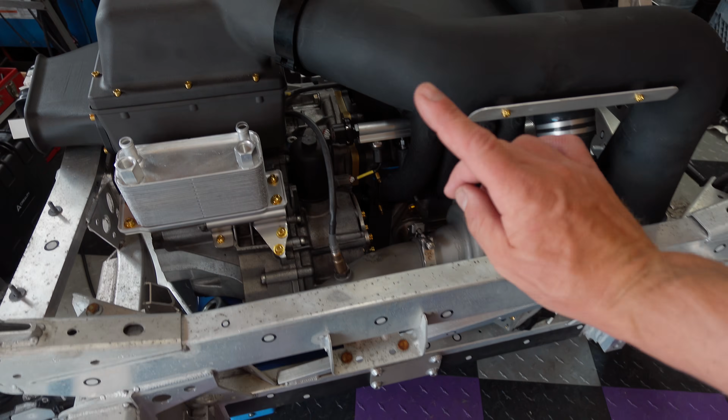So this is how we're sitting today. Everything is semi-assembled into the subframe. The street-ported 13B is fully sealed up and ready to go and permanently mated to the DQ500 DSG. We've seemingly stumbled into a black and gold colorway thanks to some gold anodized titanium and some other accents.

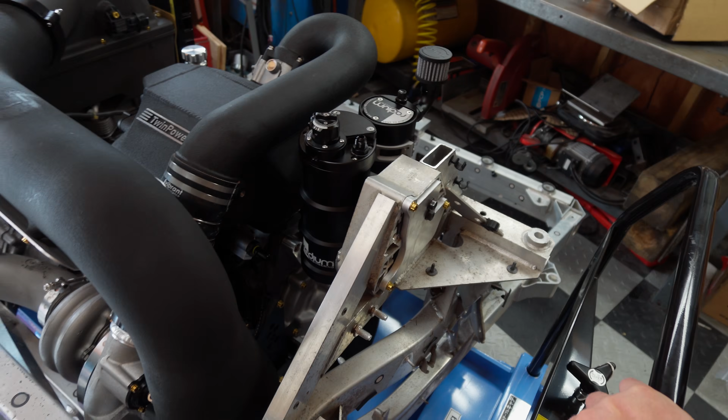Now this whole thing is sitting on a very expensive lift cart that I was very unhappy about buying, but this does enable it to get low enough to get under the car and does allow me to move this thing around the garage in the interim. My old lift cart, which is now being occupied by an 8HP50 for another project that you'll be introduced to shortly, goes nowhere near as low as the 3-inch working height of the new cart. So this, in combination with some yet to be designed adapters to my QuickJacks, will get everything high enough on the car side and low enough on the motor side to swap this thing out from the bottom.

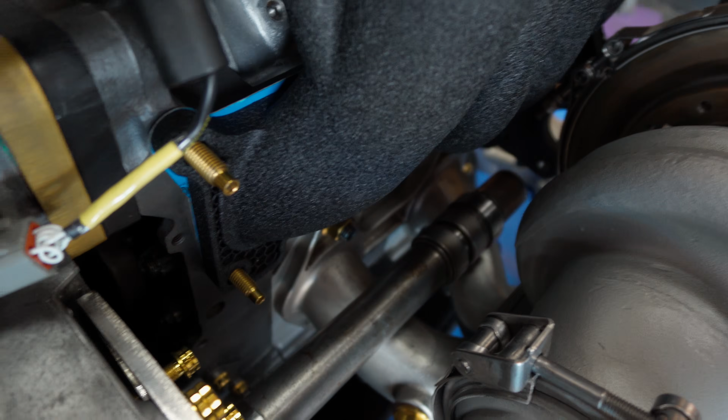One of the areas of frustration and delay so far has been the intermediate shaft. The factory Audi RS3 unit is too short for my application, so I need to get a custom one made. Ideally, I wanted to find the correct GD&T for the mating splines on these, but I have yet to come up with that, so I will likely need to provide this piece along with the mating parts to whatever shop I'm going to use. I've been in contact with Driveshaft Shop, might look at a couple others as well, and essentially they'll take these, replicate them as best they can, which is not ideal, but for a one-off, I guess it's going to be functional enough. And hopefully, if I break something, any of the replacement parts will fit as well.

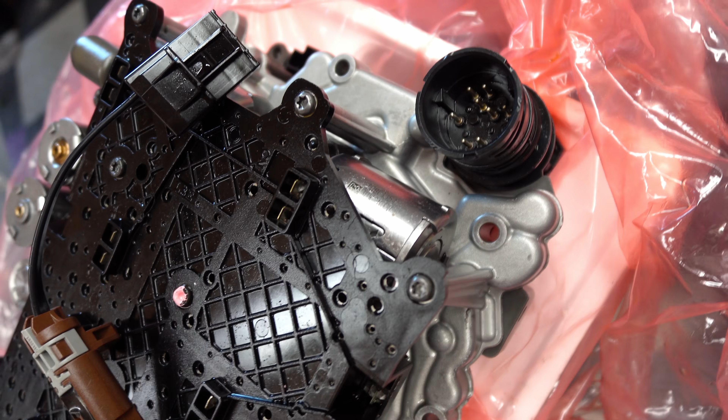If any of you have been following along since I built the transmission adapter for my DQ500 7-speed DSG to the rotary, then you would know that I bought a late model MQB series, and my ECU Master can only control the early model OBH mechatronics. I finally bit the bullet and bought a Chinese remanufactured set of mechatronics, which was a bit of a challenge in itself, as the first company that I bought it from decided to ship it to Florida and I'm in Connecticut. And then despite the invoice actually having the correct address, they had the gall to say that I provided them with the wrong shipping address. So after a credit card chargeback, I found another Chinese company who successfully managed to deliver the complete mechatronics unit to my door. Everything that I've seen indicates that this is a 100% direct bolt-in swap, and I just haven't performed it yet due to the fact that I don't want to get transmission fluid all over my floor.

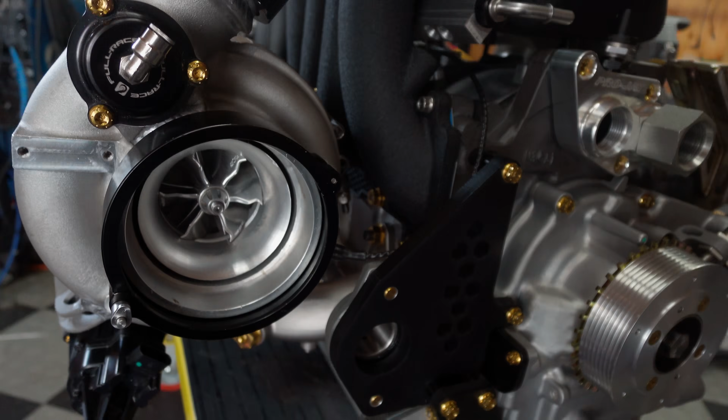So one of the areas that we're going to cover are some of the modifications that I had to make to my BorgWarner 8374 turbo to integrate it into the rest of the system. Some of you may have noticed that my compressor wheel is a little funny looking, almost like the blades are bent. That is actually because the wheel is from Bullseye Power and is supposed to be their drop-in Batmo wheel upgrade. This was already installed on the turbo that I bought because at the time, other 8374s were on back order, so I bought what I could get, and it remains to be seen whether or not this is actually an upgrade, but we'll find out soon enough.

The main thing that we had to do was to integrate an electronic wastegate controller so that we can have full control over the wastegate flapper regardless of any of the intake pressure. Electronic wastegate actuators in general can make a ton of force, and it's very important that you have a very stiff bracket that's not going to flex, because even the smallest amount of wastegate flap actuator movement can have a pretty dramatic effect on your boost control.

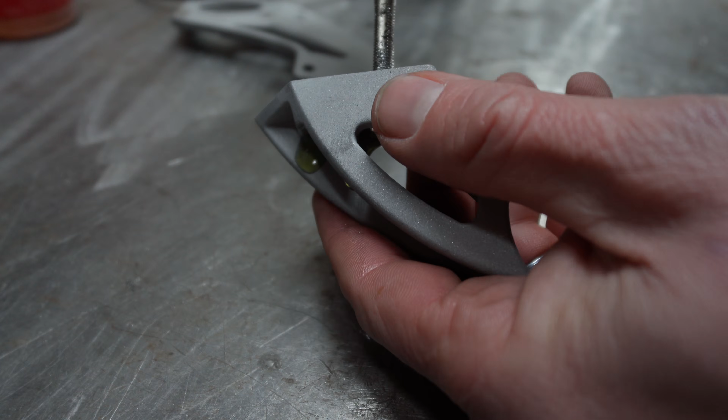In my case, the main bracket was 3D printed in stainless steel, and I have a secondary bracket out of aluminum that gets welded to the compressor housing. For any of the 3D printed parts, I'll display the cost for any of these components. Keep in mind that these are pre-tariff, so you will need to add whatever relevant charges depending on where you're located.

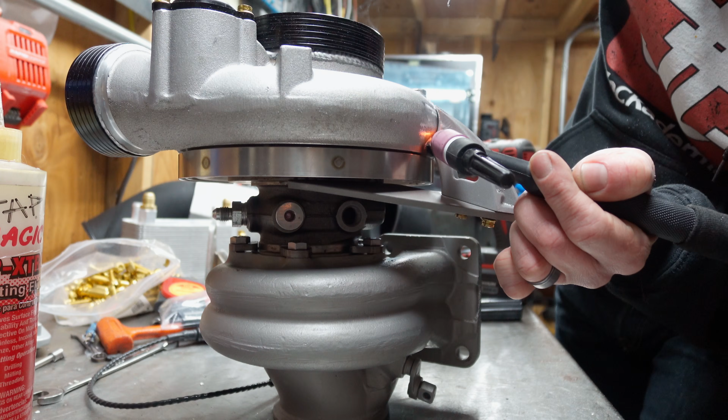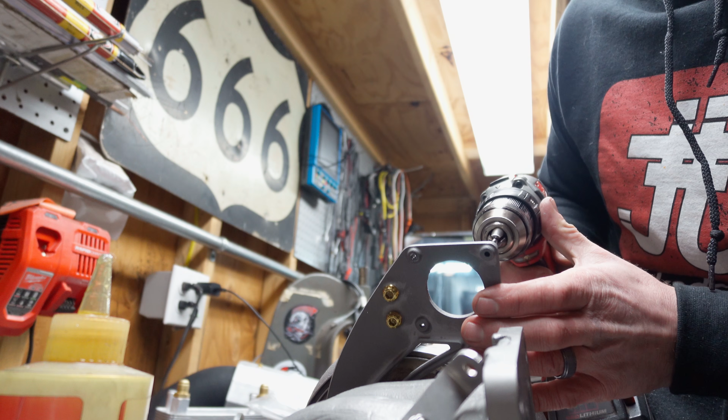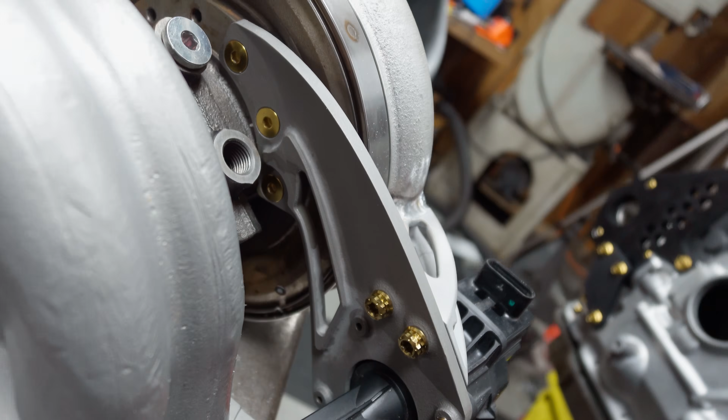Decided to chuck the M4 tap into the drill to power tap it, which amazingly did not break off in any of the holes. Now we have a nice triangulated bracket that shouldn't flex under the force of the actuator. Finally, we need a tap for an 1/8 inch NPT plug, and this will likely be getting a water methanol injection nozzle in the future.

Next, we need to make a linkage for our electronic wastegate actuator. Here we made a part that connects both to the wastegate actuator flap as well as create a heat shield to keep heat away from the plastic housing in the actuator.

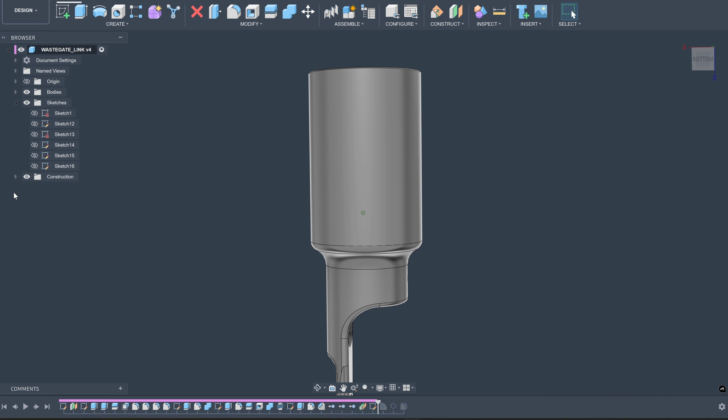For those wondering how I created the hexagon textures on the part, I used the emboss tool. I created a sketch with the hexagons and then used a circular pattern to fill out the rest of the part. One thing to keep in mind when you're using the emboss tool is that none of the sketches can protrude past the body, otherwise it's going to crash and burn.

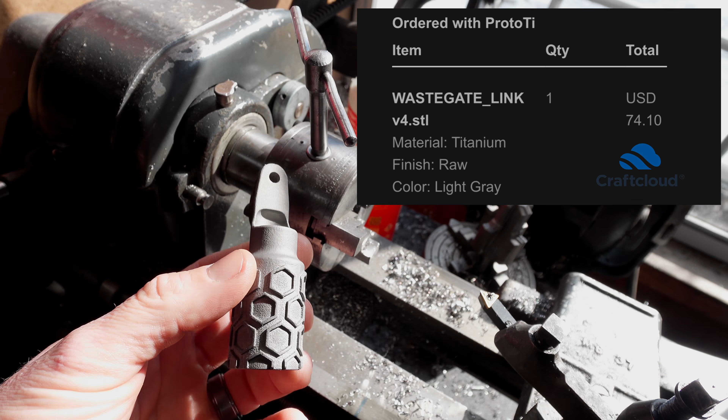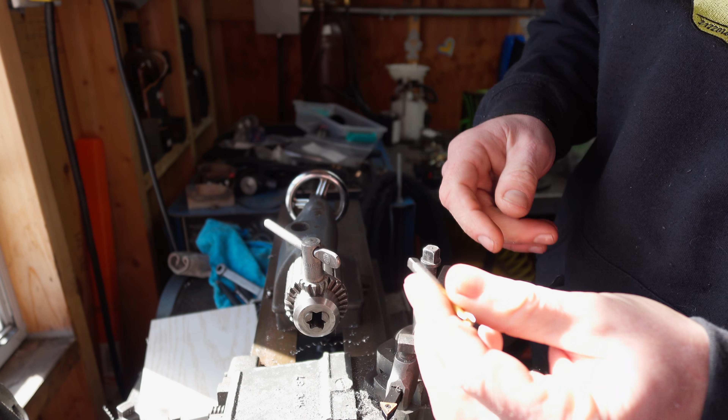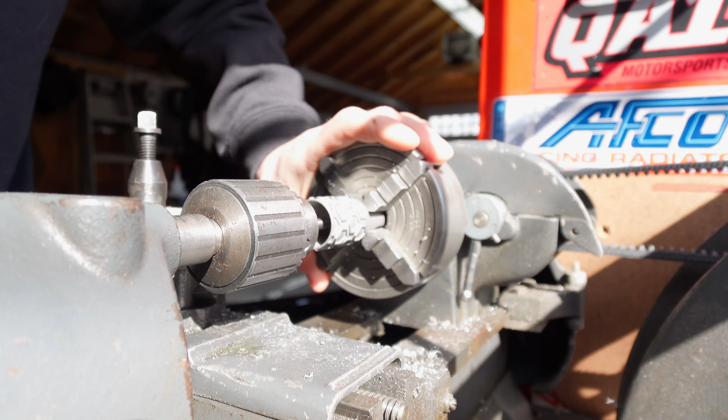For this part, I decided to try 3D printed titanium for the first time. This will make for a nice, lightweight, low inertia part that's not going to adversely affect the performance of the actuator. To make sure that this tapped nice and straight, we're just going to chuck it in our lathe and then run the tap in by hand. I then used a shoulder bolt and a rod end bolt to round out the rest of the linkage.

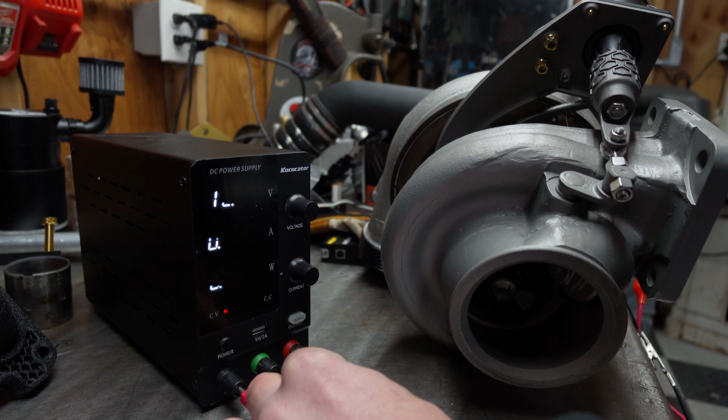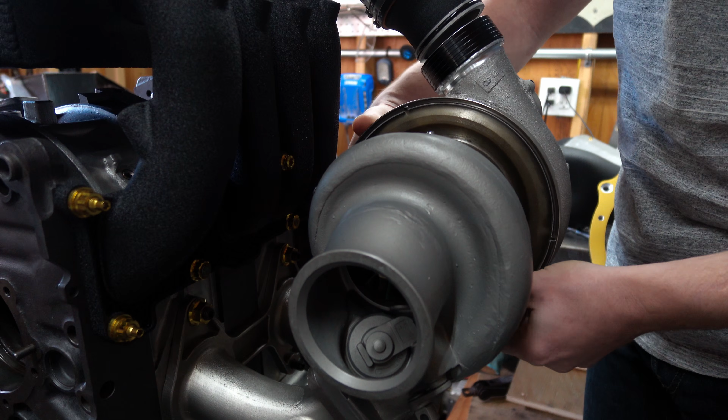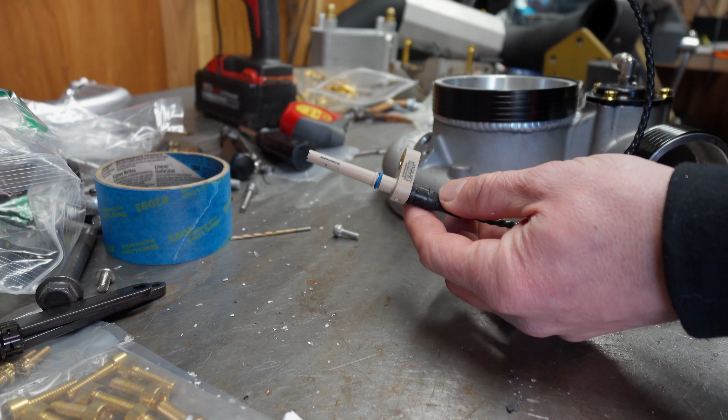Hooked up to a benchtop power supply, we can see that we get the full travel of the wastegate actuator arm without any binding and without our bracket moving around. Another quick modification we had to do was to drill out the hole for our compressor wheel speed sensor. It might be tempting to cut that AMP connector off and replace it with a Deutsch unit, but there is some internal circuitry in there, so your sensor's not going to work if you go and do that.

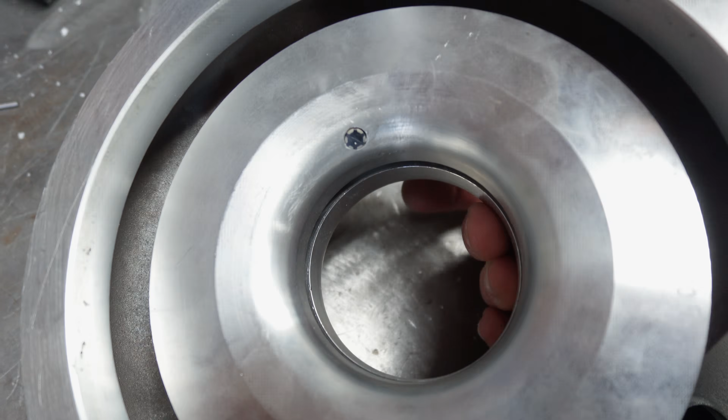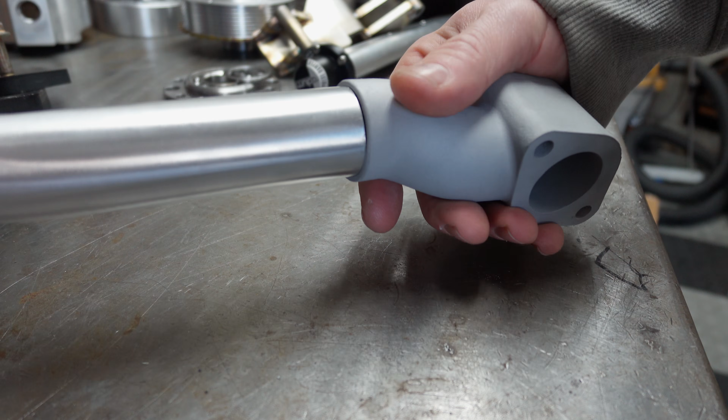Next up, we needed some way of putting oil into our 13B once the motor's in the car, and again we turned to 3D printed metal. In this case, an aluminum base that allowed me to use an off-the-shelf 90-degree bend to allow the filler to aesthetically line up with the intake manifold.

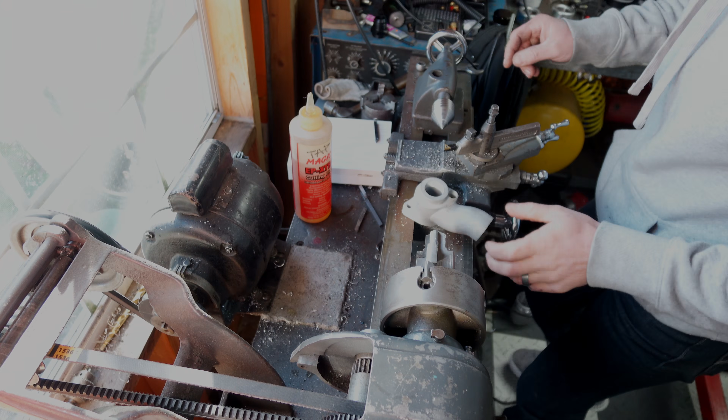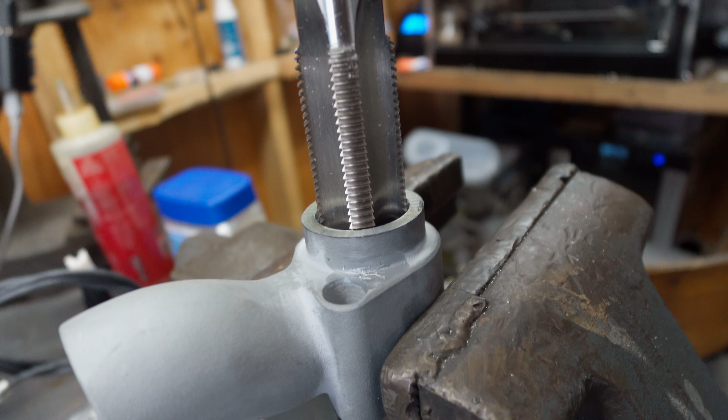We did need to thread the top of the filler block for a -12 ORB fitting. I got a bit lazy with fixturing everything up for the port tool, and OSHA has left the chat. With the port correctly sized and all fingers intact, we went through and finished tapping the hole.

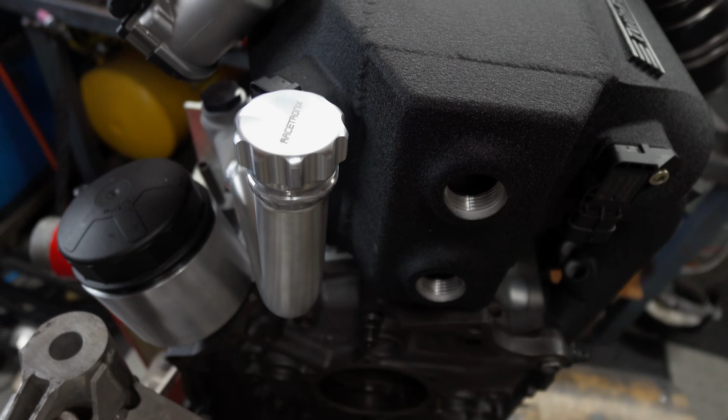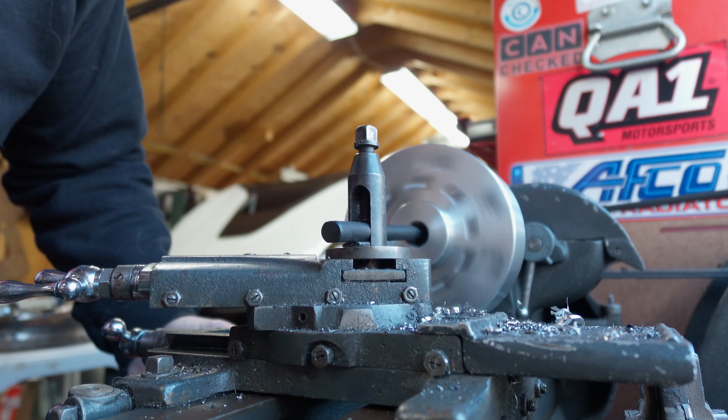One thing I omitted originally was a pilot bearing for the adapter for the dual mass flywheel to the 13B. Before final assembly, I machined a pocket for the OEM Volkswagen Audi bearing.

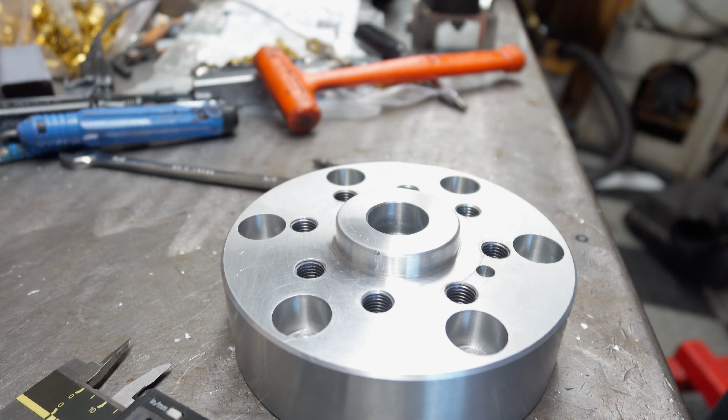With the rotary, the oil cooler is going to be pretty important because this type of motor uses the oil for cooling just as much as it does the water-based coolant. I decided to use a stacked plate oil to water cooler, much like BMW does, to avoid running oil all the way to the front of the car. There's not really a place for great airflow in the back of the car for a traditional heat exchanger. One of the largest and most available stacked plate coolers I was able to come up with is actually the transmission cooler from a Dodge 2500 pickup truck.

For mock-up purposes, I bought the cheapest version on Amazon that I could find, but because it seems that the OEM coolers can fail at a fairly high rate, and there's probably a lot of junk on the aftermarket, if anybody has a line on what the most reliable version of this cooler is, drop a line in the comments so I could pick one of those up.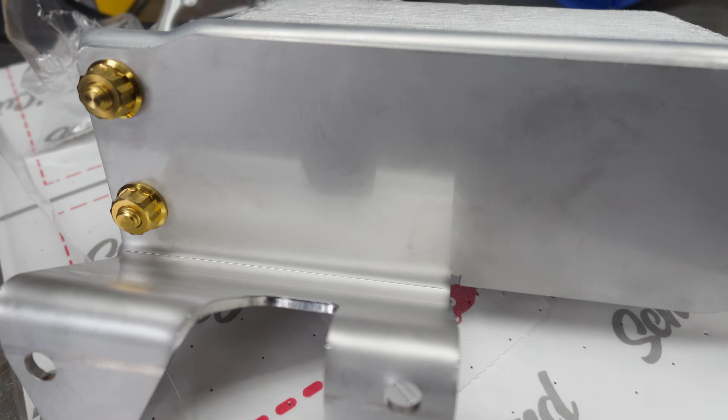As mentioned earlier, there's not a lot of places to effectively mount things. There's a lot of fairly large objects that have to sit somewhere out in space. For a lot of these, I leveraged our friends over at SendCutSend to make bent sheet metal brackets to support those components.

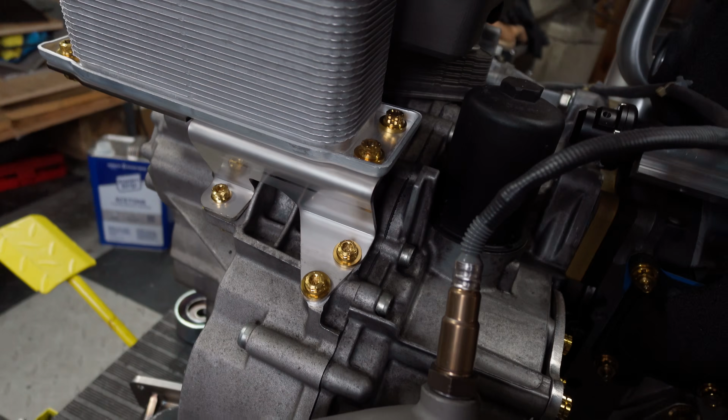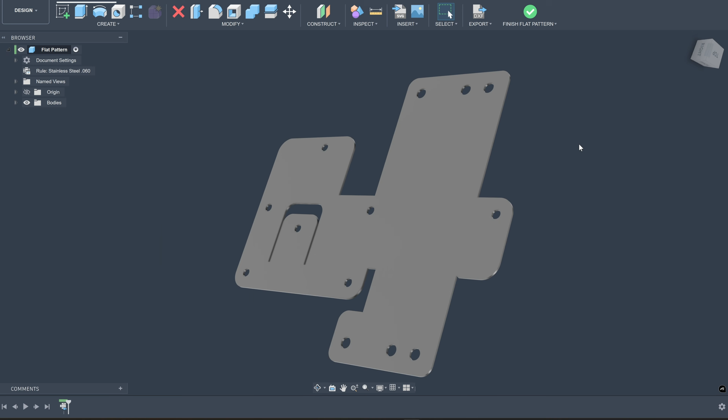In order to mount to irregular shapes, I leveraged the use of joggle bends for a lot of these, so you can end up with different planes to attach to different levels of geometry on the same sheet metal part without the use of additional hardware. You can see where I did that here for mounting the ECUMASTER as well as my auxiliary controller. And using the flat pattern tool in Fusion's sheet metal environment allows an easy export to SendCutSend.

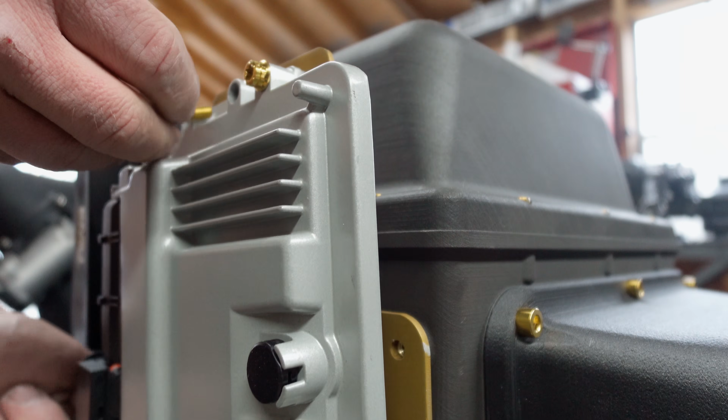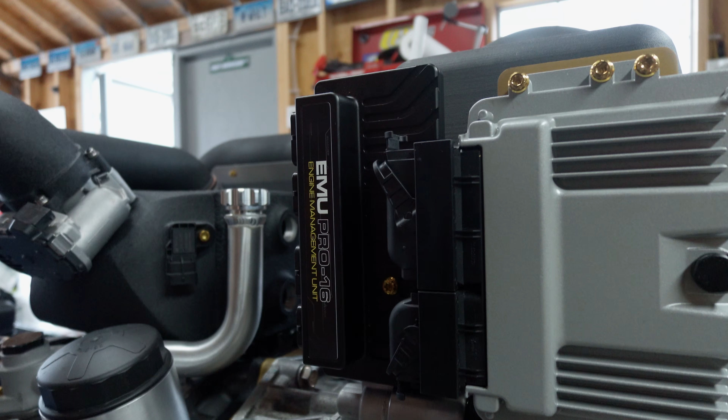Another pair of large parts hanging out in space are the fuel surge tank as well as the air oil separator. There's an arm that offsets the main mounting bracket from the mounting plate on the subframe. And then I designed a combination bracket that mounts to the factory mounting holes on the surge tank and then utilizes half of the supplied bracket for the air oil separator.

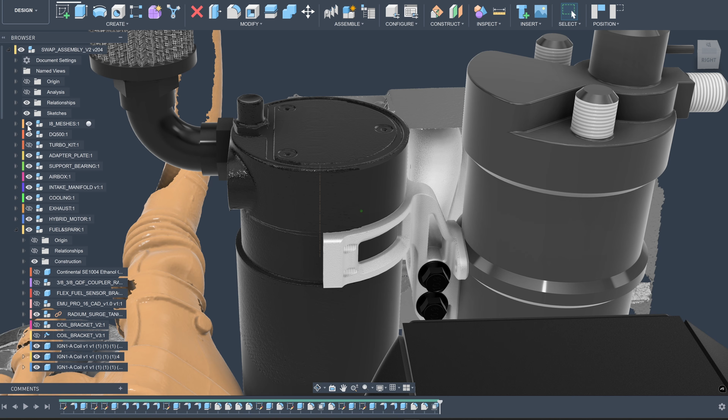The sheet metal portion of the bracket bolts to the subframe where the factory right side motor mount used to reside, but that is no longer used, so I was able to repurpose those holes.

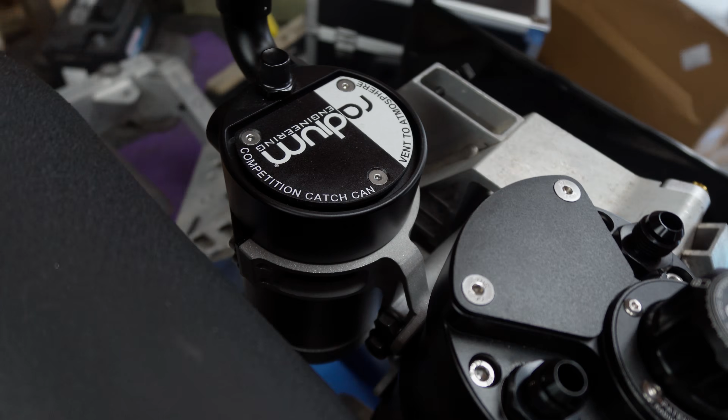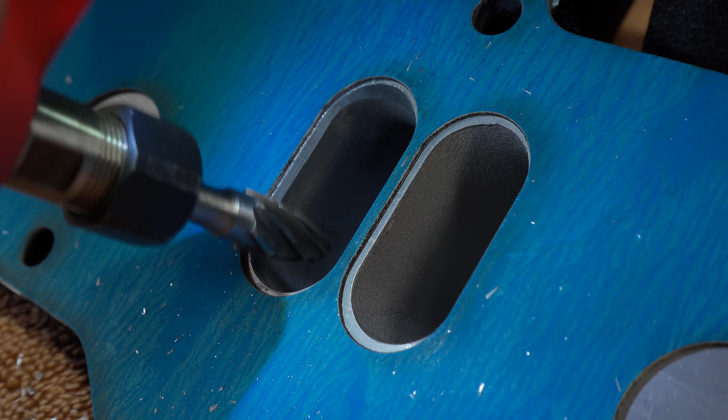Next, we need to turn our attention back to the intake manifold to finish some things off. Upon receipt of the intake manifold gasket, I found there was an opportunity to port match my intake manifold to better match the motor.

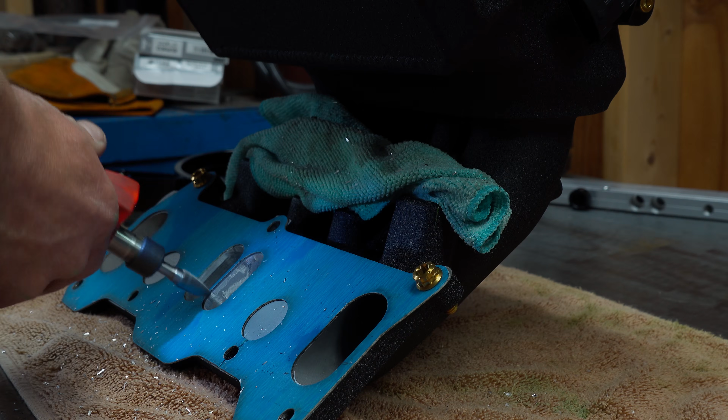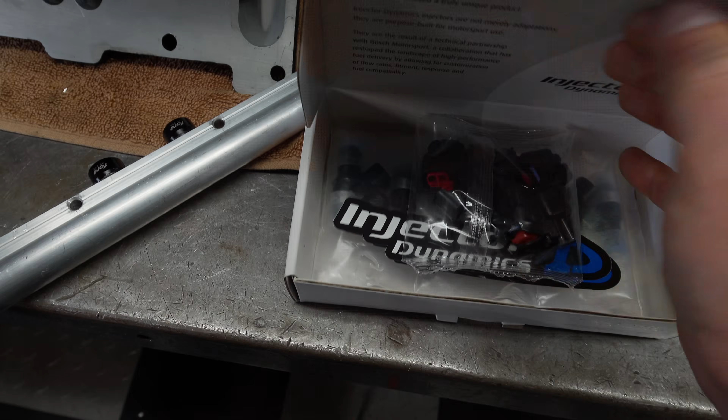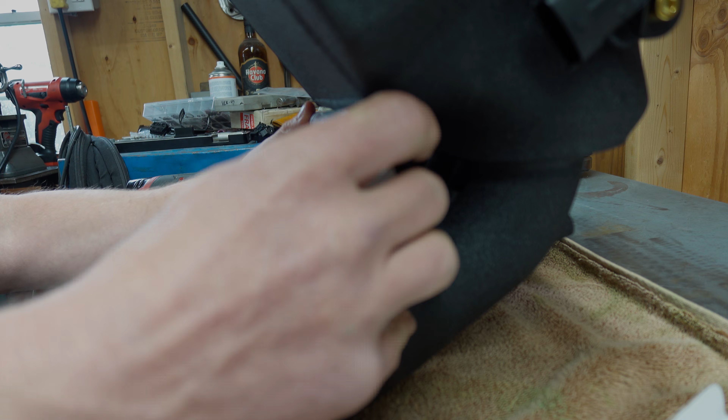For fueling, I'm using 6 Injector Dynamics ID 1050s. This is going to be more than enough fuel on gasoline for any of the power that I plan to make with this motor. I did consider E85, but that isn't readily available here in Connecticut, and I'm really not a big fan of ethanol jelly if the car happens to sit for a little while. For me, E85 is going to be more trouble than it's worth.

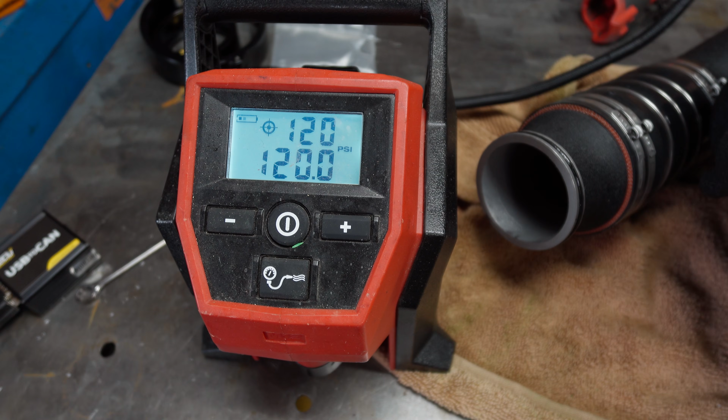And as usual, we'll pressure test everything because many of the components in this car came out of cars that burnt to the ground, and we do not want to repeat history. At this point, we're getting very close to wiring the car, and I have almost all the components to do so, and therefore we're going to start installing some of the sensors on the engine so we can start running the wires.

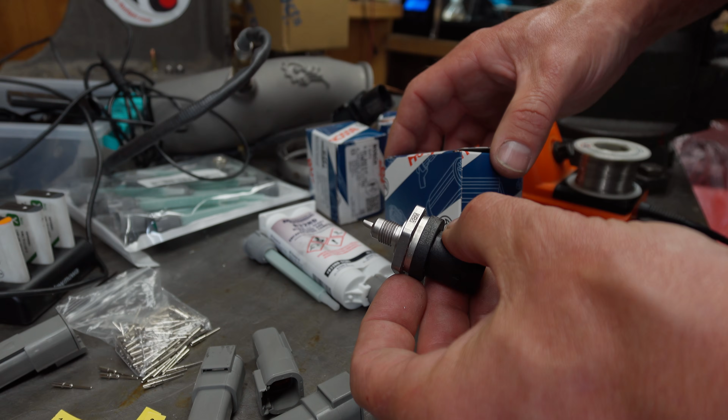What we're using for sensors on our fluids is going to be a 145 psi Bosch temperature MAP sensor. These are used in some OEM applications. I believe this part number goes in an Aston Martin of all things. And these are really handy because, as the name suggests, it has both the pressure sensor as well as the temperature sensor in one unit. Because they are used in OEM applications, you can typically expect some pretty decent reliability, except for the fact that I have seen some complaints about these sensors actually failing.

And when they fail, the failure mode is fluid leaking past the internal diaphragm through the pins and into the harness, which the wire is then going to wick the oil, coolant, or fuel up into the harness, and depending on the situation, could even go so far as to getting fluid into your ECU, so that's generally going to be a pretty bad time, all things considered. At that point, I don't think you have any means of actually repairing your harness. You'd probably just have to start over.

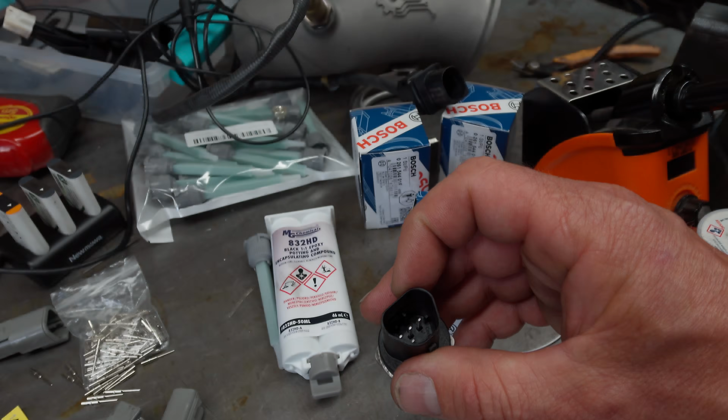And what we're going to do here to mitigate that situation is make a small intermediate harness that gets soldered to the pins. Generally, soldering is frowned upon in an automotive application, but the one instance when it is generally acceptable is when it gets potted. So we're going to solder the wires onto here, fill it with a 2-part potting compound, and then that will do two things. It will make sure that our solder joint does not crack, and then furthermore, if the sensor does fail, it will prevent any fluid from reaching the rest of the harness.

And before anybody asks, this is a Dymo Rhino 4200 label maker, and I use generic heat shrink label cartridges and then protect them with Raychem clear heat shrink.

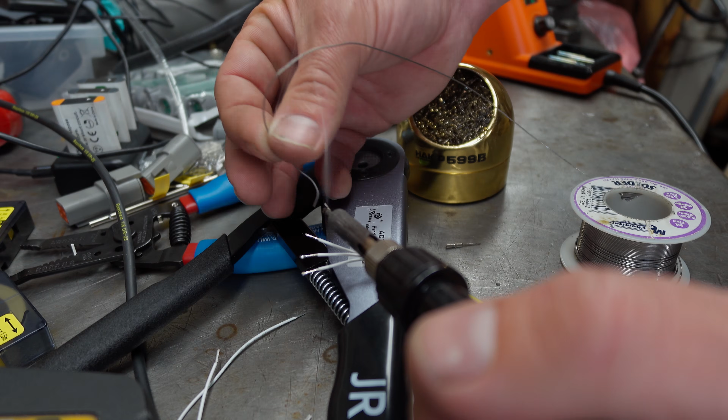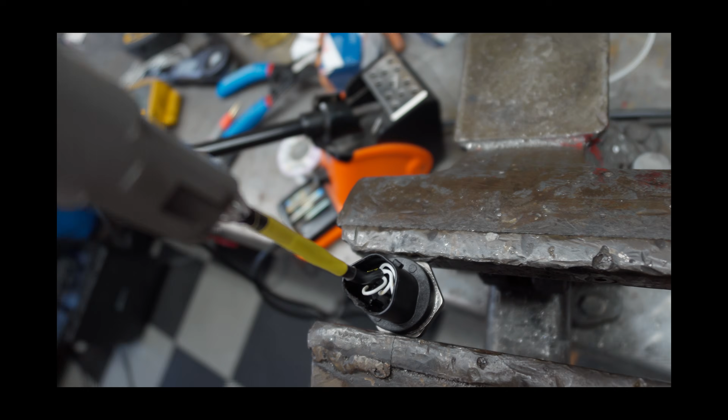The connector port on these is kind of deep, and it was a little bit of a pain in the ass to solder to all the pins, especially on the 4th or 5th connection. Maybe next time I will get a longer soldering iron tip to make it a little bit easier, but we were able to make solid connections and then get ready to fill everything up with epoxy.

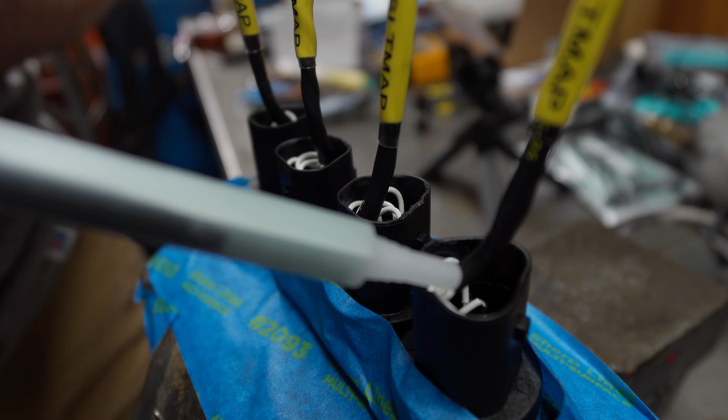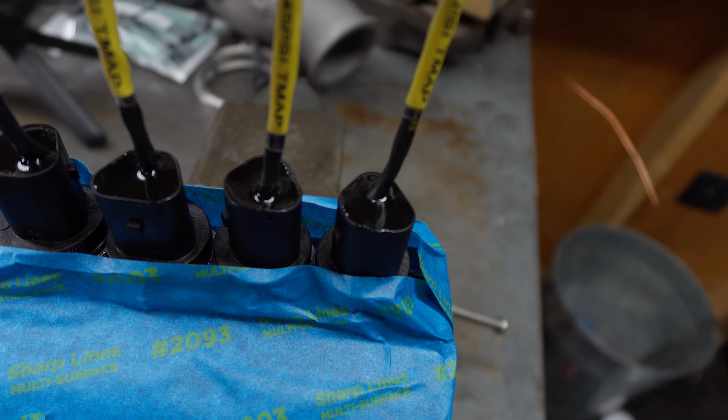Actually, I hate to break it to anybody who's already commented, but yes, I do read the data sheets, and I'm well aware that this has a vent to reference atmospheric pressure because these are relative pressure sensors. However, some quick tests after potting reveal that they work exactly as intended, at least at sea level. So ultimately, potting these sensors is going to be the solution that is going to prevent us from ruining our harness and or our ECU in the event of a sensor failure.

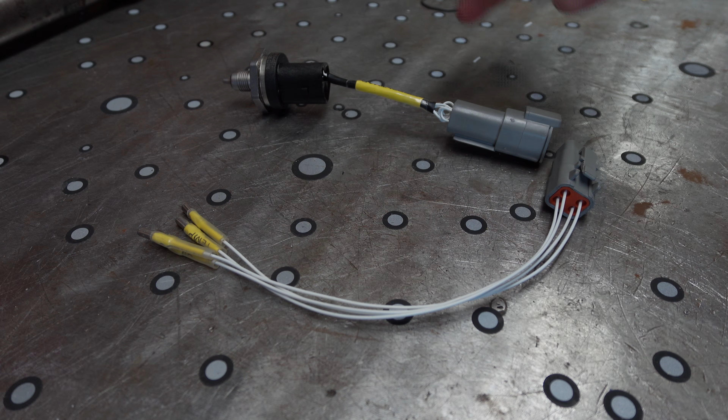So for electronic stuff, anytime I have a custom assembly such as this that's potted and the wires go to a non-standard connector, I will typically make a test harness and then have an uninsulated butt connector halfway crimped on one side with the connections labeled. And then this facilitates some very nice easy testing. So if you're at the track or just doing your general assembly and you want to verify that your sensor is working, you can easily access the pins there.

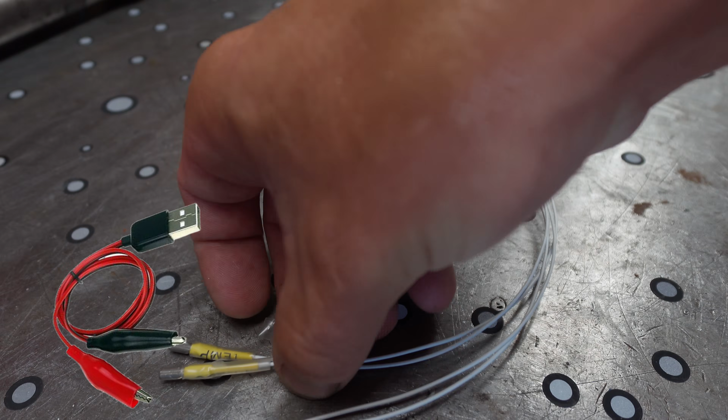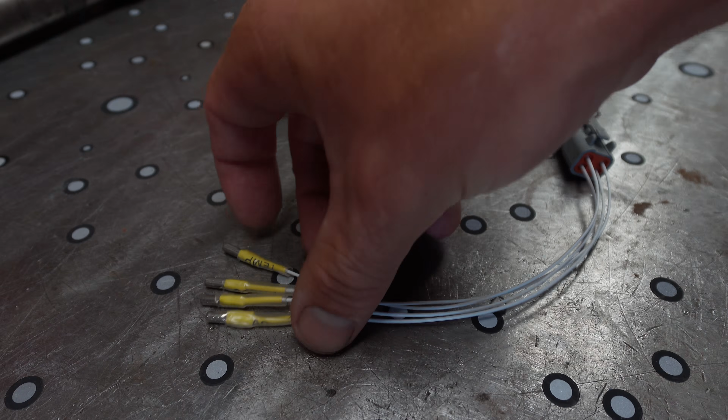Another nice thing is that since these run off 5 volts, if you're ever at the track, you're obviously not going to have a benchtop power supply, but a USB power bank will supply the required 5 volts and has more than enough current to support testing a sensor. So it's a nice, quick and easy power supply if you need it, or even your laptop. But I generally don't like doing that, especially with exposed connections like this, because you could very easily short that out.

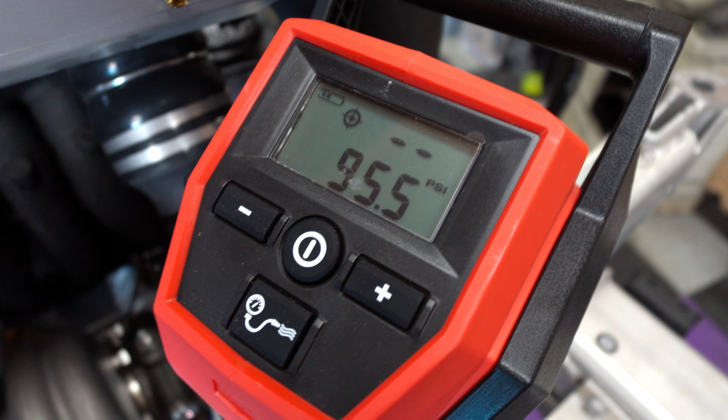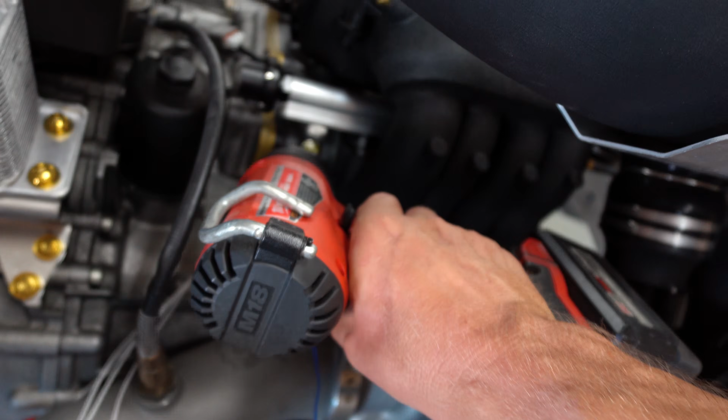For our accuracy test, we hooked our sensor up to a benchtop power supply set at 4.95 volts. With our fuel rail pressurized to 95.5 psi, that gives us a reading of 94.99 psi at the sensor, well within the normal range of tolerance. Having possibly created a temperature sensitive air pocket, we decided to try heating up the sensor to 180 degrees, and this gives us a deviation of about 1/4 of a psi. That is plenty accurate enough for oil pressure or fuel pressure.

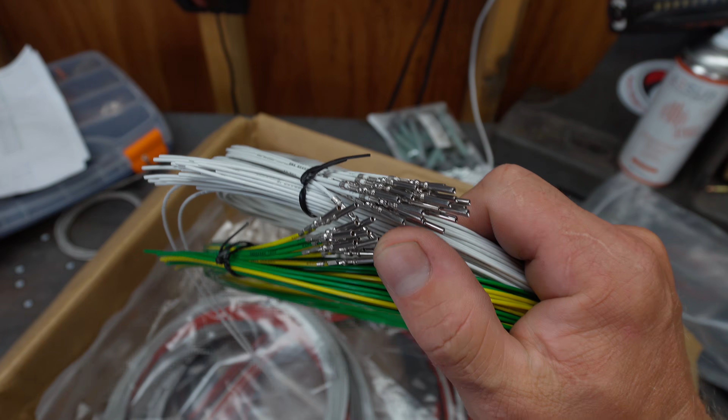On the topic of wiring, inside this box that UPS so graciously crushed for me, we'll find all of the wiring that I'm going to need for the wiring harness from a pretty cool company called Your Spec Wiring, and you'll see a whole bunch more on them in the full-length video on the wiring harness. But the really cool thing with this is it is all pre-cut to length, pre-terminated on one end, Tefzel, and the cool part is that every single one of these is marked with a custom label as to what I need it to be in my application. So that is a really cool service that can save you a bunch of time and money, and we'll go a lot more into that in the future.

So what's next for the project? I'm waiting on the rest of my plumbing hardware so that I can then make mounting brackets, and those are going to be combination brackets that the wiring harness can run parallel to those hoses wherever possible. Once the wiring harness is complete, we should be in a position to fire this thing in the garage, but now that it's actually mobile, I'll be able to wheel it out into the driveway and then smoke out the entire neighborhood as all the lubricants burn off in the 13B.

After that, I've got a number of small parts to design, including a bearing and seal adapter for the intermediate shaft of the transmission. Then I will hopefully be in a spot to swap this thing once it starts getting cold outside. I really don't want to be doing this in the middle of the summer, and I'm still enjoying driving the car as it sits. From a timing perspective, I'm hoping to get the car torn apart in late fall after the effective driving season is over and it's not too cold, and I can get this thing into the car before the first snowfall. Once I have it in the car, I'm sure there's going to be a huge number of things that I didn't plan for, but that's half the fun in the problem solving of these projects.